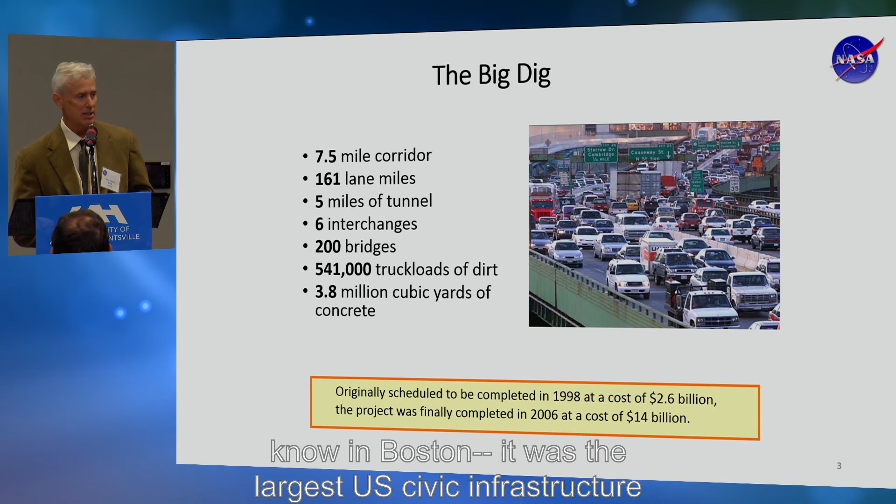The Big Dig, kind of affectionately or not so affectionately known in Boston, was the largest U.S. civic infrastructure project in the history of the United States. And if you look at the metrics there, they're just kind of hard to fathom.

5 miles of tunnels, 200 bridges in a highly densely populated urban area. But the metric I'd like everybody to take particular note of is at the very bottom: in addition to all these amazing things that needed to be done, the project was billions of dollars over cost and years behind schedule. And what you're going to see is that decisions were made that were very mindful of those schedule and cost pressures.

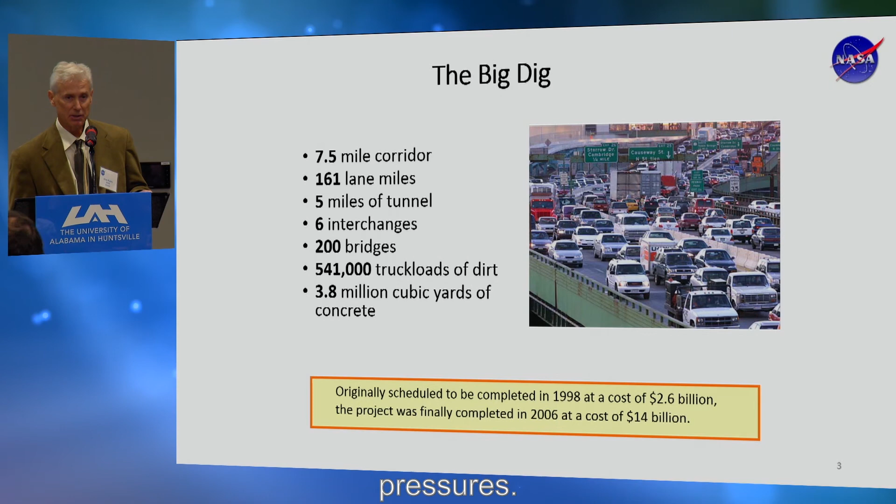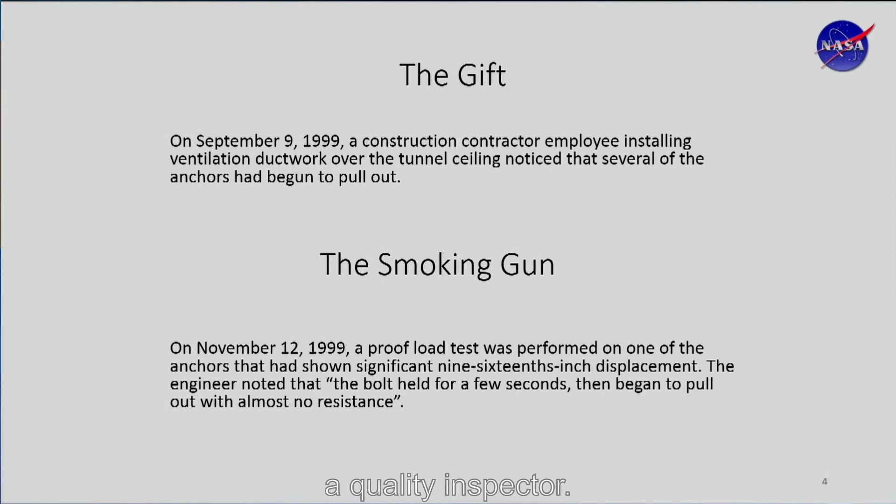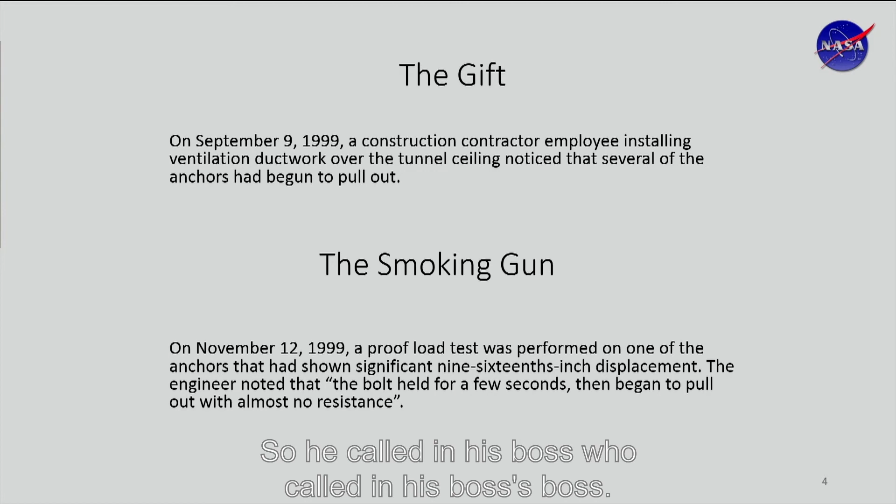So the story begins September 1999. A construction contractor employee, not an engineer, not a quality inspector, noticed that some of the fasteners in the tunnel ceiling had started to pull out. He thought, whoa, this just doesn't look right. So he called in his boss, who called in his boss's boss, and they pulled in the engineers to evaluate what the deal was.

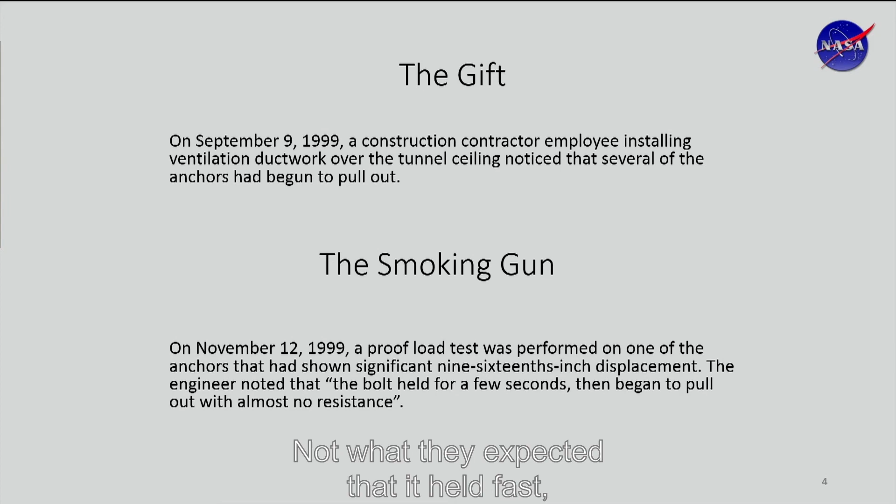They performed proof testing on this particular fastener and a number of others that had also been observed to have pulled out. And the behavior was not what they had ever seen before, not what they expected - it held fast, strong at the proof load pressure, but then it just slipped out very quickly. So that was a pointer to a causal factor that was not understood or seen at the time.

So this is what the contractor employees saw.

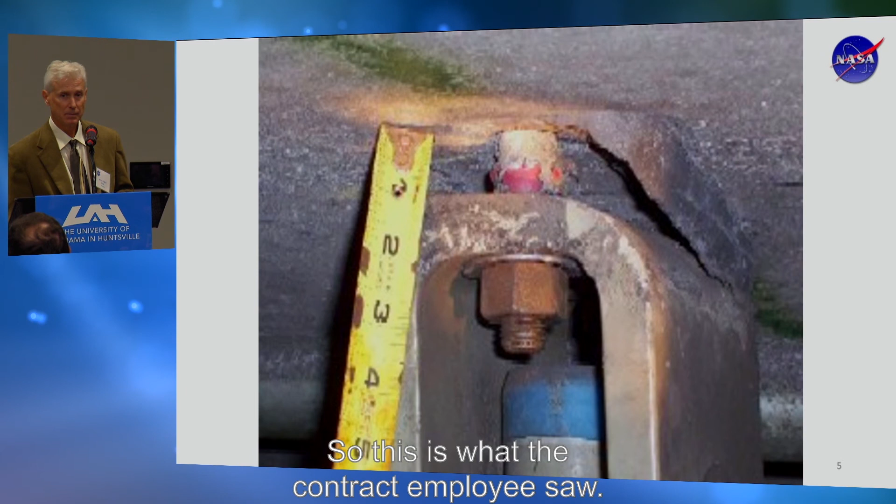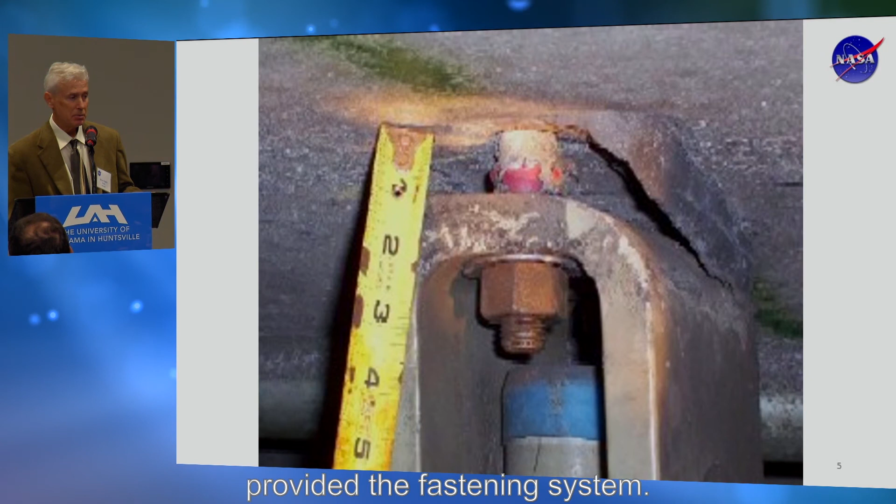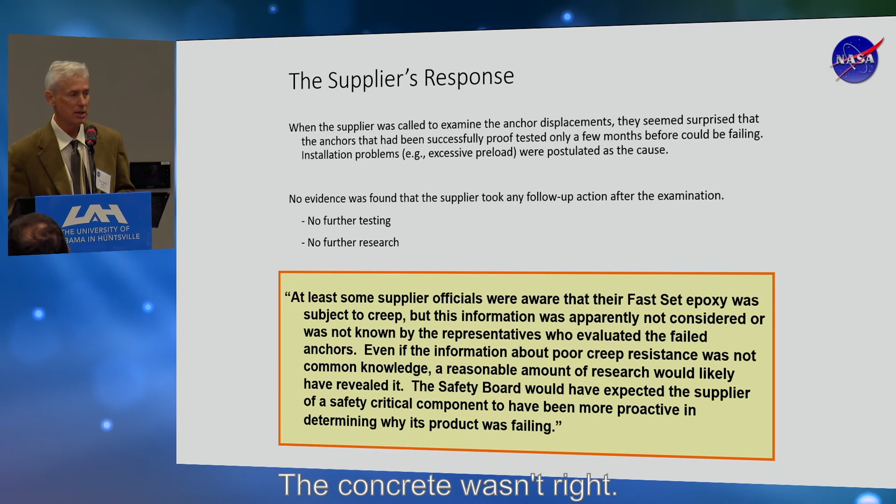So they did what you would expect them to do. The construction company and the engineers called in the experts, the fastener supplier who provided the fastening system. They came in, looked at it, scratched their heads and said, I don't know - this was proof tested, it passed, it had to be you guys. The concrete wasn't right, the cleaning procedures weren't adequate, the preload was excessive - some other reason besides the fastening system being inadequate. They didn't do anything beyond that and then walked away.

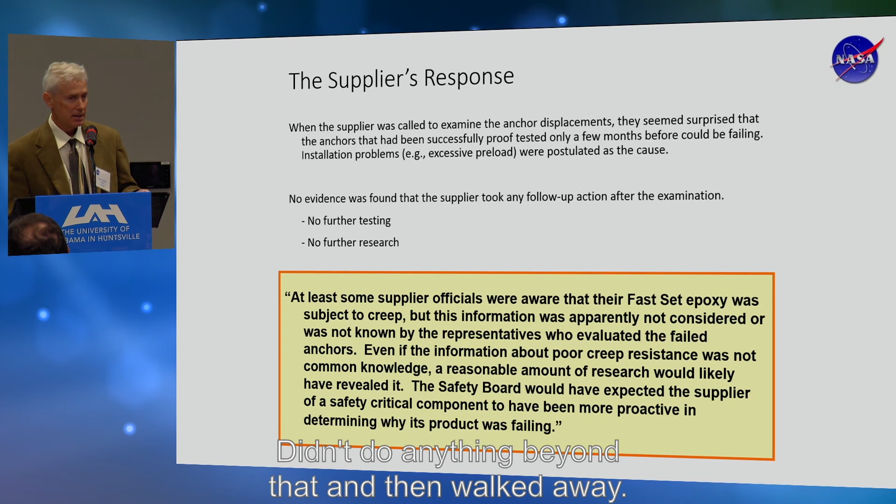So you're left with the builder, design agent, project manager trying to figure out - okay, the experts have spoken - so they fall back to tried and true proof testing. And just to show you the seriousness that they took this for, they went at it with vim and vigor.

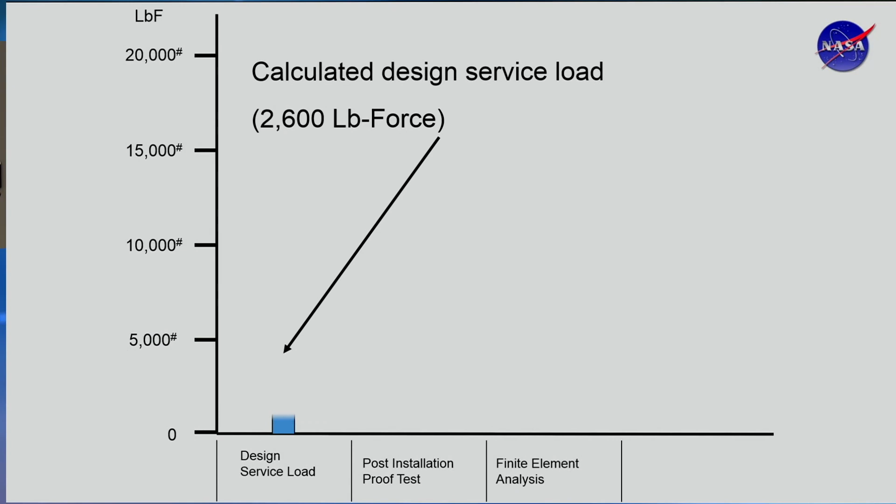The design service load was 2,600 pounds. They had been previously strength tested to 25% over the design load, 3,250 pounds, successfully - all of them.

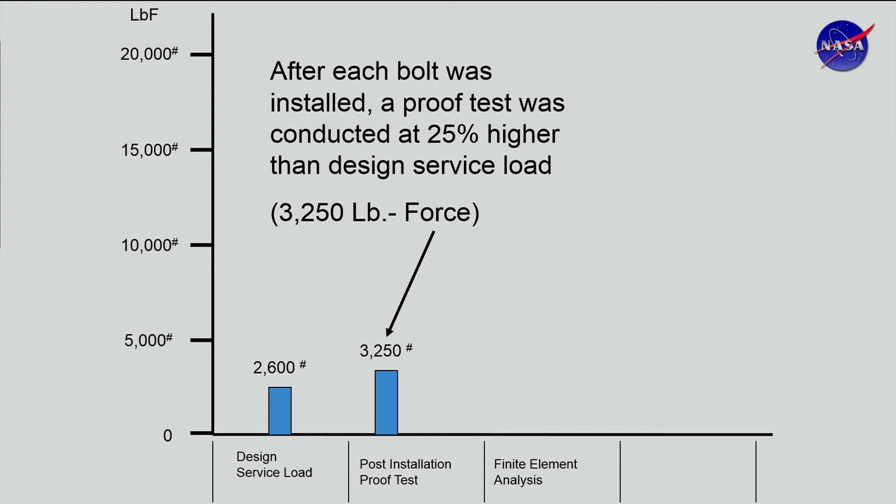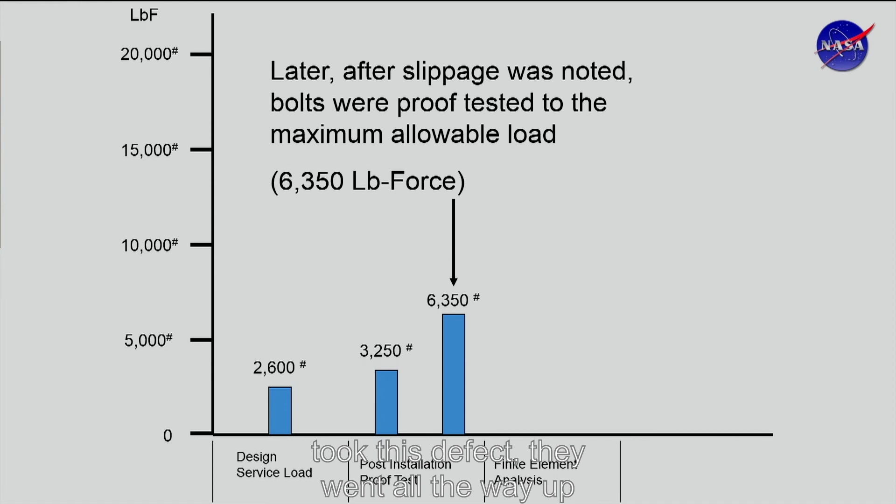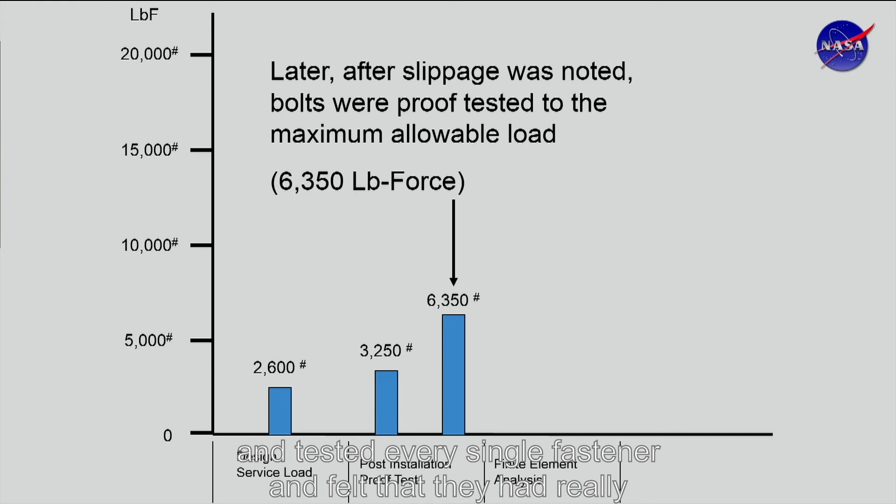And then to show the seriousness with which they took this defect, they went all the way up to failure - pre-failure, maximum allowable load - and tested every single fastener, feeling that they had really done their due diligence. To complement that, they performed finite element analysis just to verify their design assumptions concerning the design loads, and everything checked out.

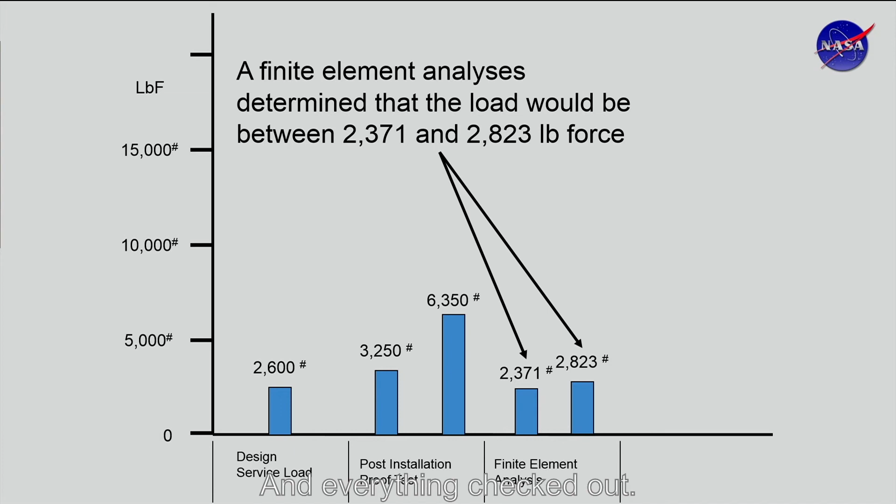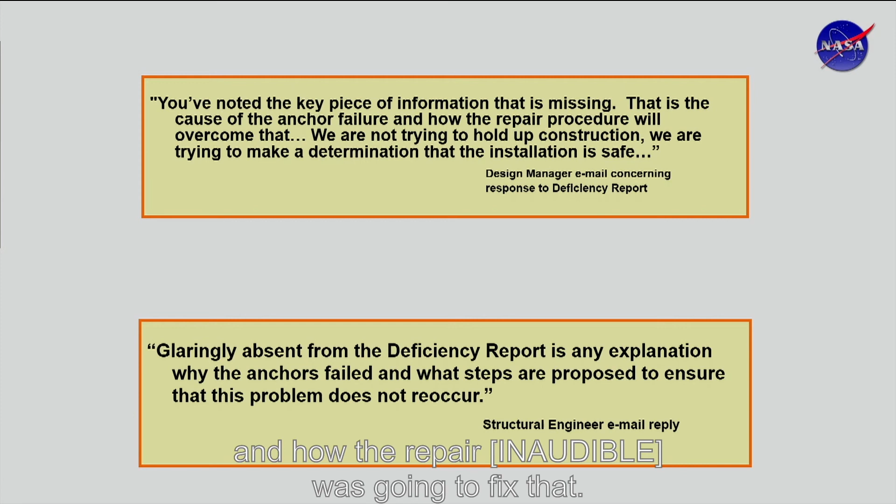But this didn't sit well with a number of engineers. Later on, emails came out - the first from a design manager, and then the reply from a structural engineer. He points out that the key piece of information missing is the cause of the anchor failure and how the repair procedure is going to fix that. The reply from the structural engineers basically agreed with this: glaringly absent is any explanation as to why they failed and steps to show that the problem doesn't reoccur.

And when I provide the same presentation to quality persons, I always ask - where is the voice of quality? Why didn't they throw down that red flag? The causal factor was not identified - you can't, don't pass go till you figure that out.

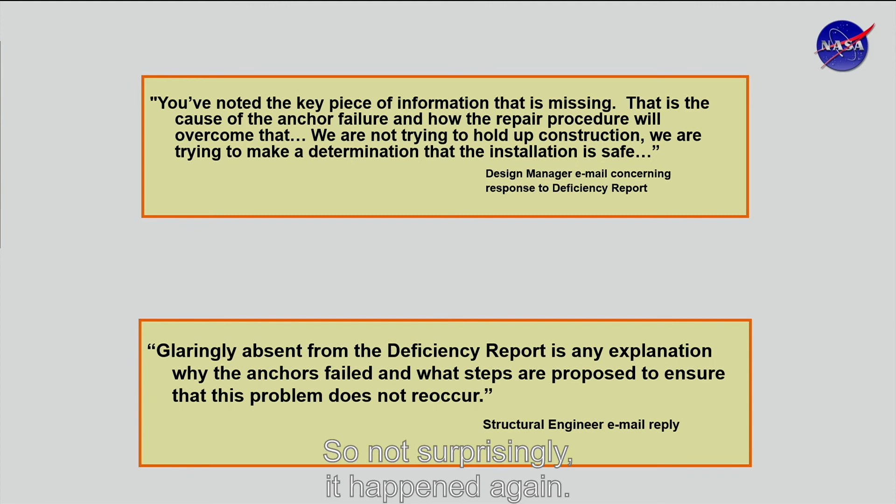So not surprisingly, it happened again. This time it was a quality inspector, and he noticed that fasteners were again slipping out, but these had been tested to 6,350 pounds, the full maximum design load. Reason for failure: unknown. And later on, after the accident, the NTSB came in and said at this point it really should have been obvious that they hadn't identified the cause, hadn't implemented effective remedial measures, yet they kept treating it as isolated instances.

As a long-time quality professional, I can't tell you how many replies - this was early on in my career - came back saying it's an isolated incident. Rarely is it an isolated incident.

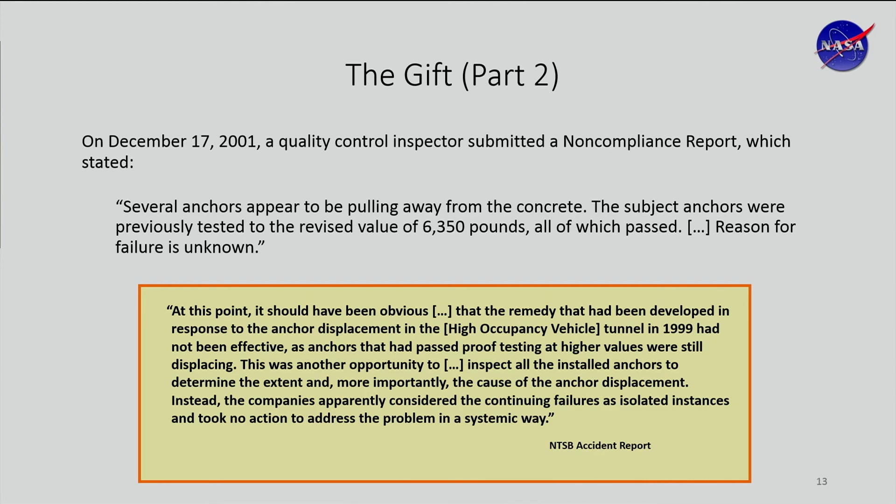And then it happened. They didn't treat it systemically, just a bunch of isolated cases. It's mind-boggling to me that when the inspector noticed some that had slipped out, they didn't do 100% inspection. That would have been quick, easy, cheap to do. So in any event, the accident occurred: 26 tons of concrete detached from the roof, landed on a passenger car, and killed the passenger.

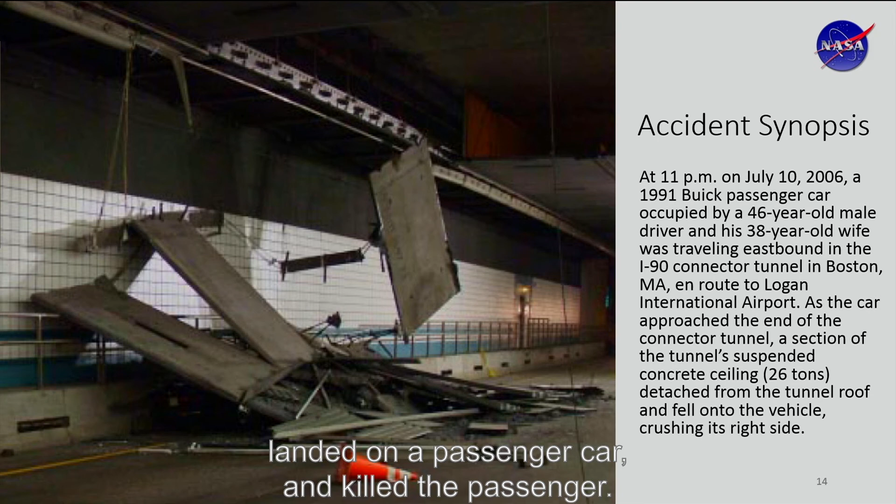So the NTSB came in, did their accident investigation, and the proximate cause was determined to be the use of an epoxy anchor adhesive with poor creep resistance. Say what? For me, I read that and thought, what is creep? Does anybody here know what creep is who didn't learn it by coming to understand this accident? Not me.

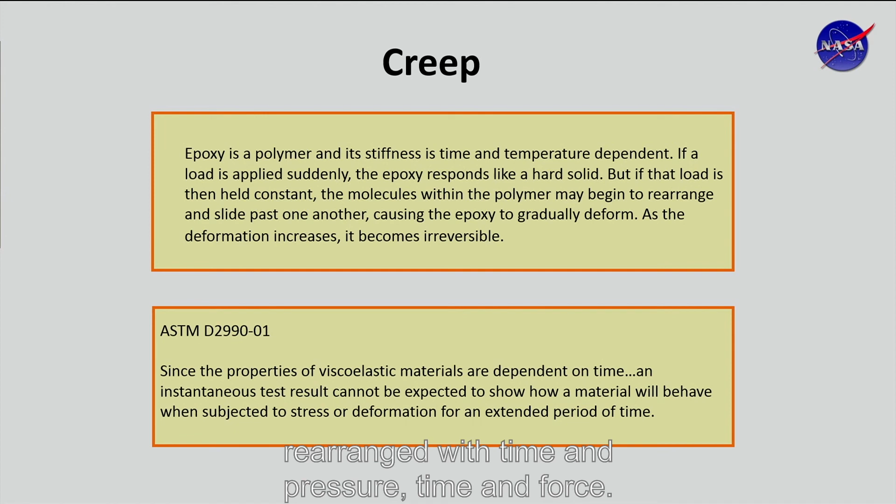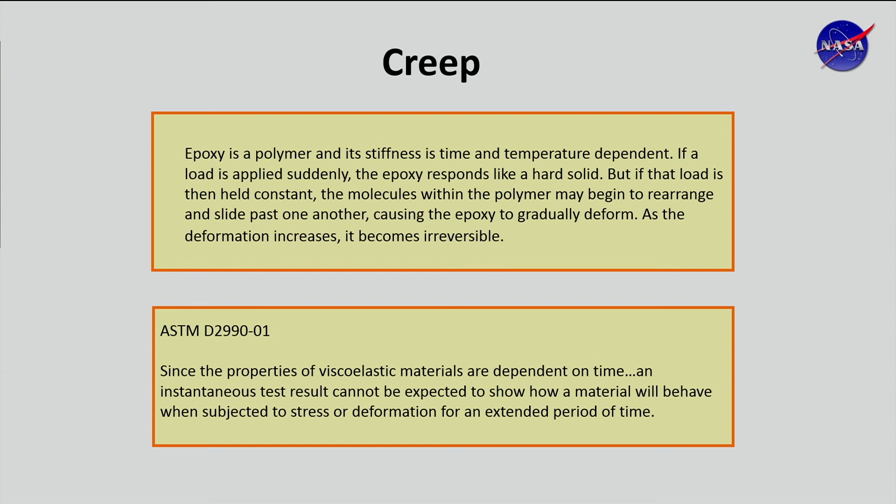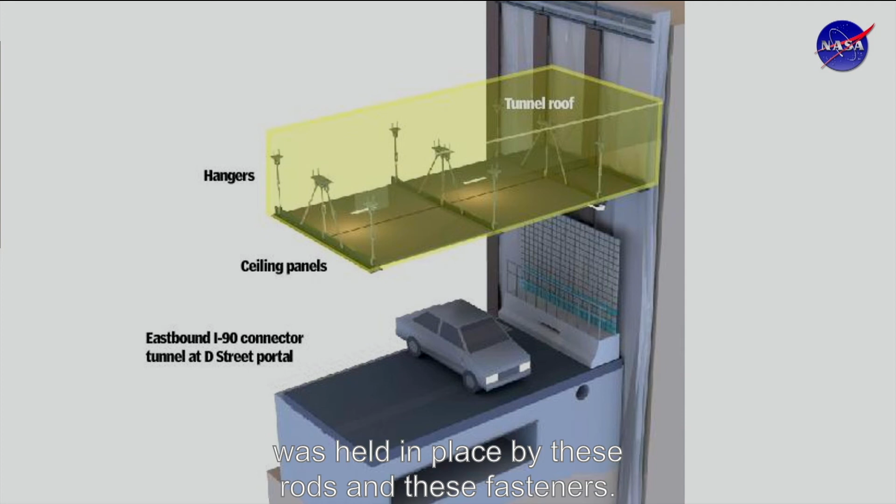Pointed in the wrong direction. So I'm going to go over a few schematics, and each of these identifies what I call a contributing causal factor of a design vulnerability. The first is that the ceiling was held in place by these rods and these fasteners, and it didn't need to be. Most tunnels constructed at that time had continuous ceilings. They didn't need to be suspended ceilings. Much safer design.

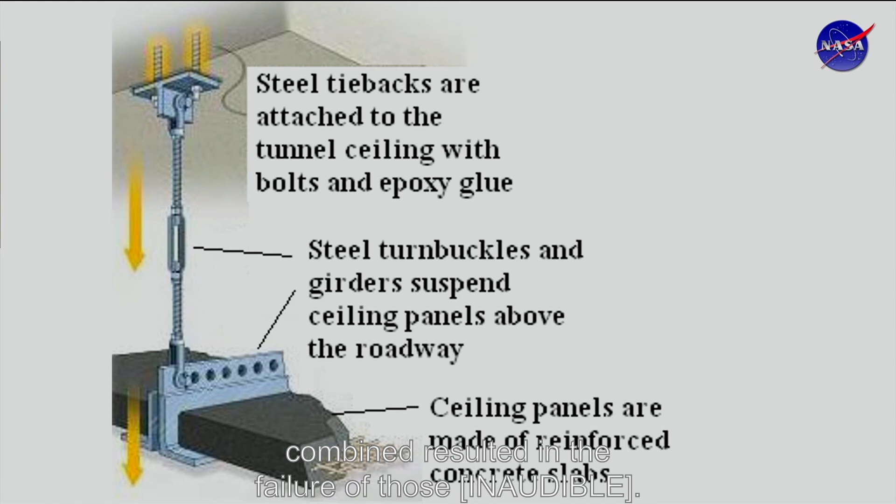Next, ceiling panels made of reinforced concrete slabs. Initially, the ceiling panels were lightweight laminate panels, and then a cost savings engineering change proposal came in that said it would cost a fraction to just make these out of concrete. That was approved. A lot of money was saved. But as we see later on, the force and time factors combined resulted in the failure of the ceilings.

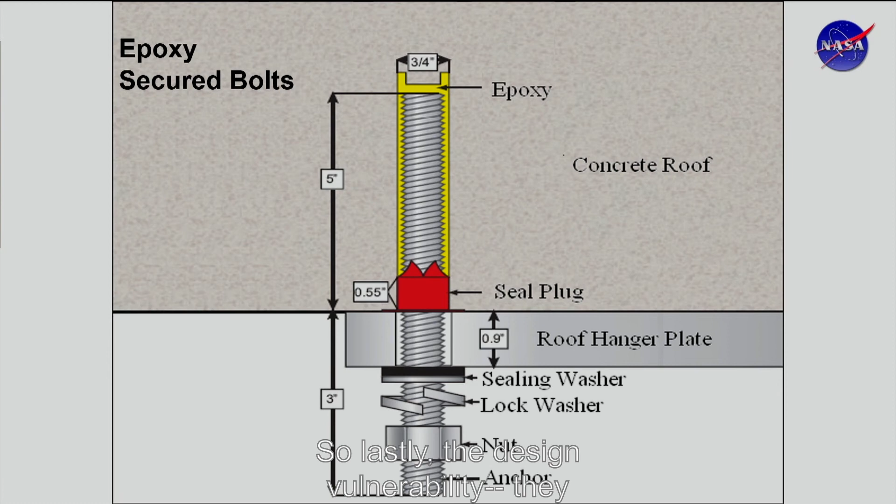So, lastly, the design vulnerability: they used basically glued-in studs. Didn't need to do that. Mechanical fastening systems were recommended by engineers and discounted or discarded in favor of this, which had inherent vulnerabilities. And just a point of note, the epoxy itself, not just the stud, is a safety critical item. Its failure can cause loss of life, and it did. You'd never expect that.

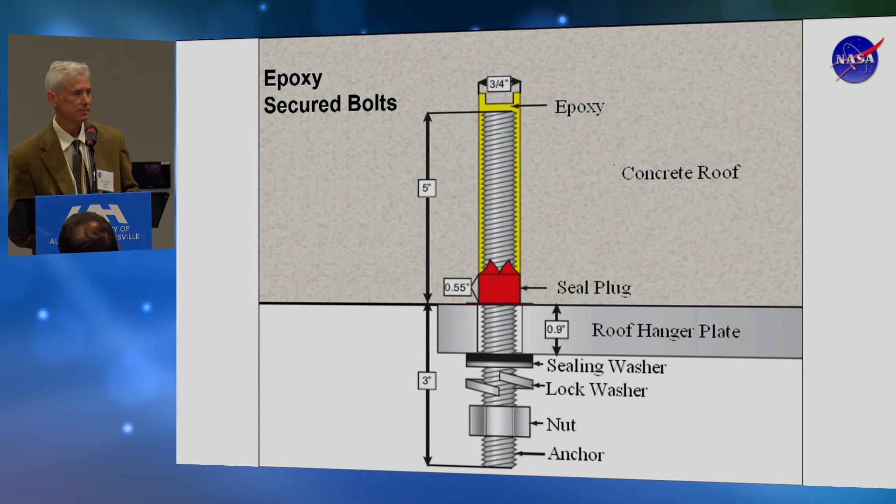So we're going to get into the unknown knowns, and this is so relevant to the discussion we just had. Corporately, the supplier manufacturer knew all about creep. In fact, they had tried unsuccessfully to pass these fasteners for creep, but the individuals called onto the scene to investigate had no knowledge of that. The knowledge had not been captured and transferred to the right people.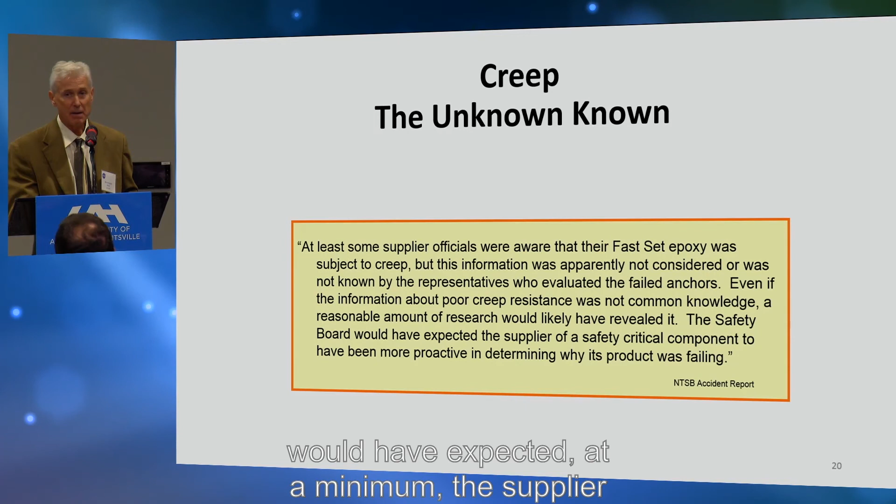As the safety board says, you would have expected, at a minimum, the supplier of a safety critical component to be more proactive in determining why the fastener was failing. And not just the supplier - culpability is spread among multiple organizations here: designers, contractors, managers, overseers. Nobody had any knowledge of this phenomenon, even though it was being used for safety critical purposes. This gets back to one of the initial slides - even after being presented with striking evidence of anchor creep, they didn't recognize the weakness. And no matter what they did, all the best installation practices, all the proof testing in the world, it wouldn't have fixed this problem because it was the wrong solution.

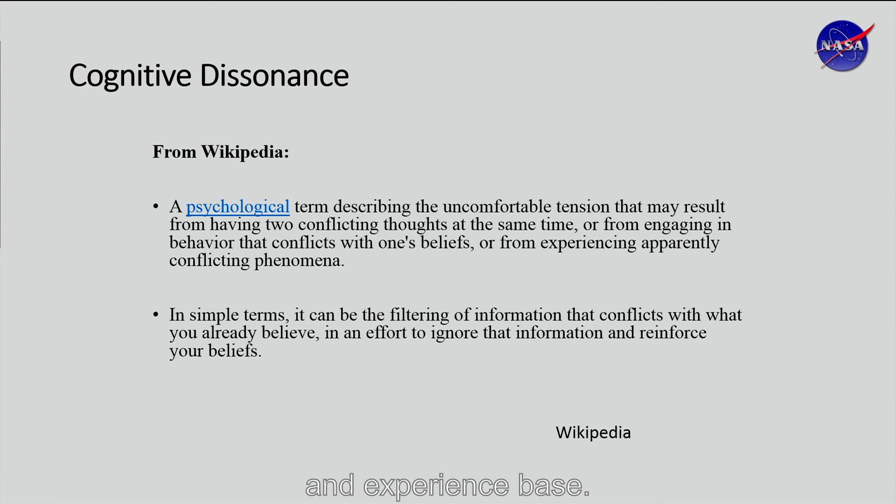So now we get into why. How could they have missed it? There are a couple terms I'm going to throw at you. The first is cognitive dissonance. It's a psychological term - effectively all of us do it. We have our own experience, our own knowledge, and everything we see we filter through our knowledge and experience base. And if you see something that just doesn't align with that, doesn't compute, is beyond your reality, you filter it out and come up with explanations that do fit your knowledge and reality base.

And that's what occurred. It's also referred to, or very similarly, as failure of imagination. This term was used in Apollo 1. It's also been used for other major catastrophes: 9/11, Titanic, Pearl Harbor.

And it's also called the black swan factor. It's when, in hindsight, it's basically 20/20 — in hindsight, it was obvious it was going to happen, it had to happen. You just couldn't see it in the present time.

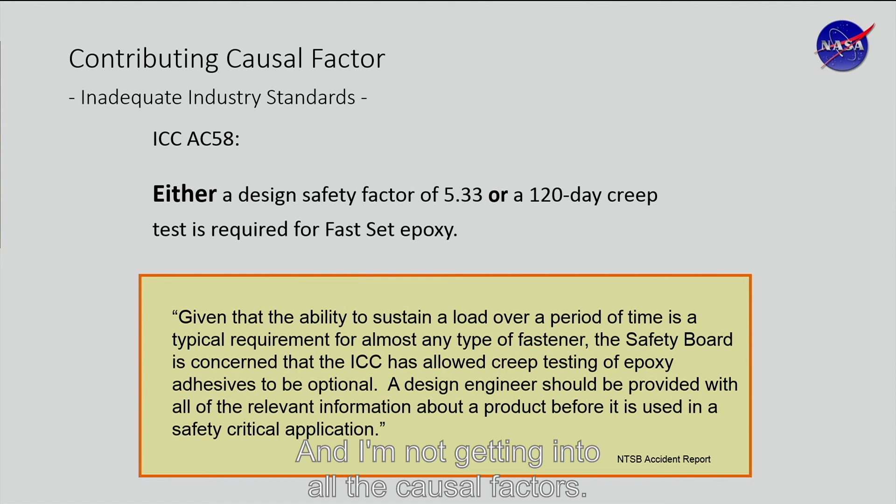So this is a little bit of a footnote, because I don't want it to be missed, and I'm not getting into all the causal factors — there's so many — but this one is particularly relevant to this audience. The question was asked yesterday about the adequacy of technical standards. Well, this is a case where the technical standard fell flat.

It gave an option of either performing a creep test or a design safety factor — effectively a proof test of 5.33 times the safety margin. And the NTSB found fault with that for good reason. As you've just seen, proof testing did not prove the safety when you have epoxies involved.

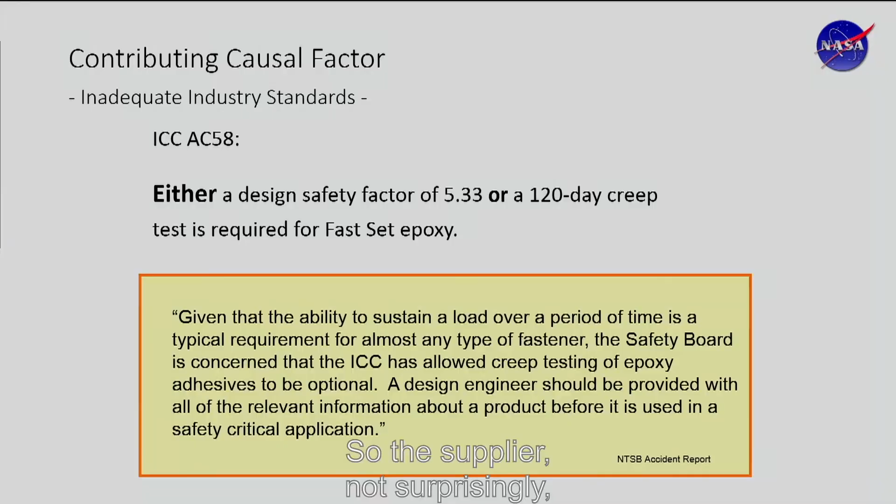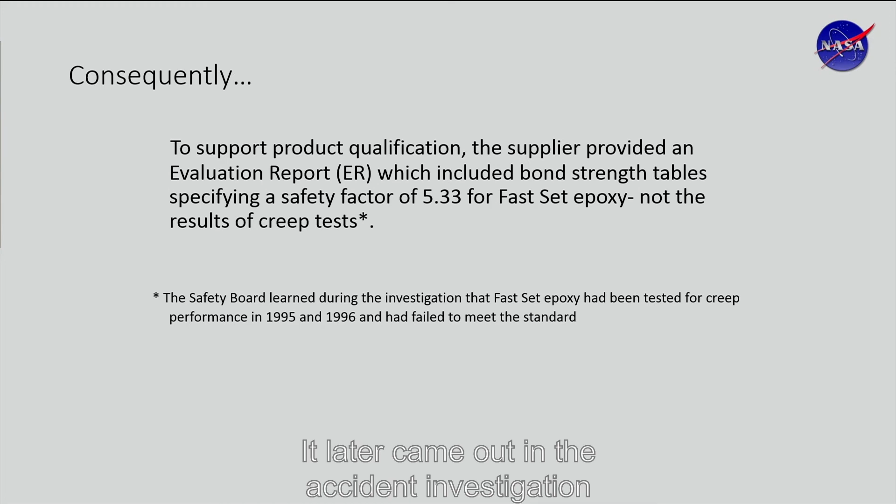So the supplier, not surprisingly, to support product qualification, provided an evaluation report showing they satisfied the safety factor of 5.33. It later came out in the accident investigation that they had tried multiple times for their fast-set epoxy to pass creep testing, and it did not. So here's a case where they provided something they had corporate knowledge was not adequate for that application.

And this is what it looked like after the accident investigation. Anybody — your child, your grandmother, your dog, if it's a smart dog — could have seen that and said this is not right. Yet nothing was done to make sure they had remedied this problem through their proof load testing.

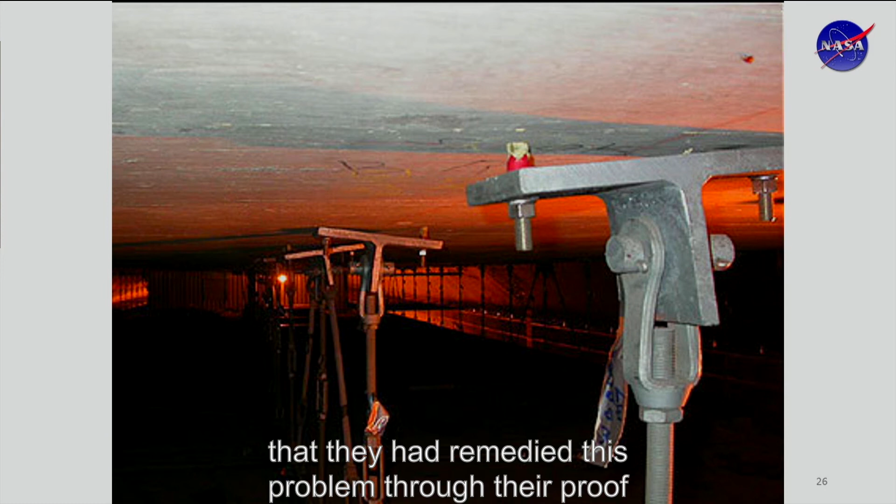And the last slide I have here is just an add-on. I came across this last week and mentioned it yesterday. How relevant is this to NASA? In a very general sense, yeah — lessons learned that have broad application. But even more specifically, how relevant are the behaviors of carbon fiber polymers? Well, they might be extremely relevant, so it's good for us to learn and heed lessons from other arenas.

Destination Disaster is the name of a book written by Paul Eddy, a terrific book that chronicles the events leading to the loss of the McDonnell Douglas DC-10. In March 1974, it left Paris, and at 11,500 feet the rear cargo door blew open, creating an explosive decompression. The plane lost all its control surfaces and crashed in a forest in France, with all persons lost.

Proximate cause was determined to be a faulty latch. Again, it's like one sentence summarizes it — just proximate cause. It's so simple: an epoxy adhesive, a faulty latch — yet there are multiple causal factors all interrelating, but often the proximate event is something very, very simple in its nature.

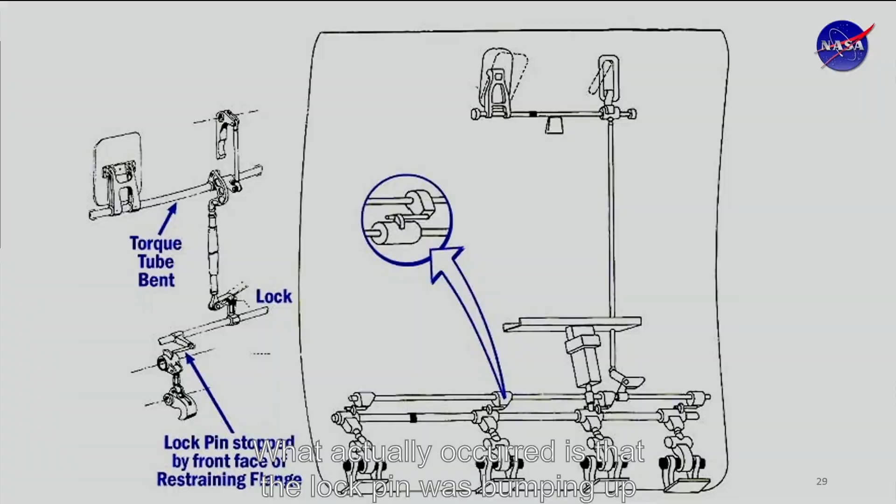What actually occurred is that the lock pin was bumping up against the restraining flange, but if you push down hard enough onto the door latch, you could actually close it, or think you had closed it. Multiple complex linkages — to quote this: a baggage handler of normal strength could push the handle fully down, thinking he had thus secured the closing door, when all he'd done was bend the internal bars and rods out of shape.

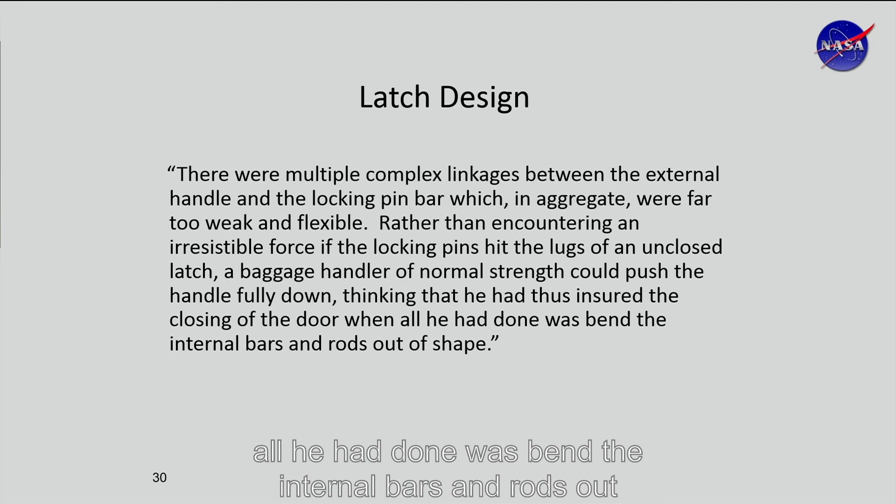So this book again is rich with insights and wonderful quotes. This is his comment upon the integrity, the goodness of the latch design. And this is a great segue, because they had such a poor latch design, the other safety factors became critical. And this is where we get into design vulnerabilities.

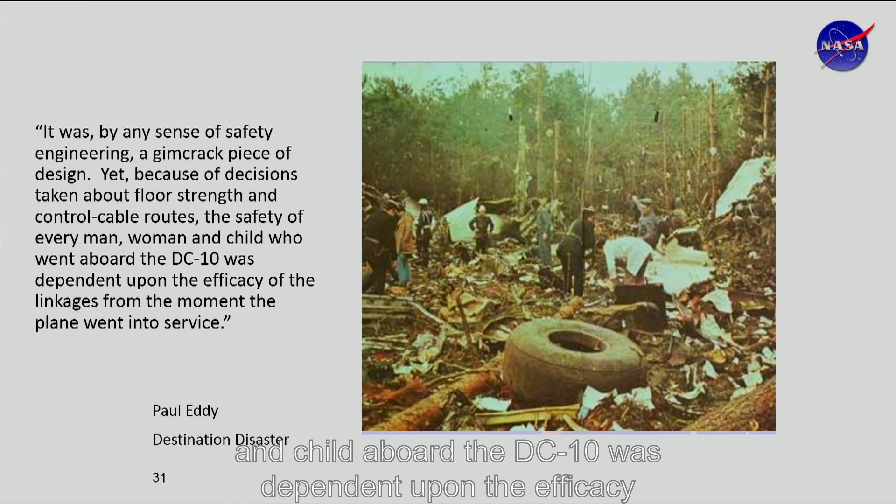He says, because you had a gimcrack — I've never heard that word before, I like that — latch design, safety in every man, woman, and child aboard the DC-10 was dependent upon the efficacy of the linkages from the moment the plane went into service.

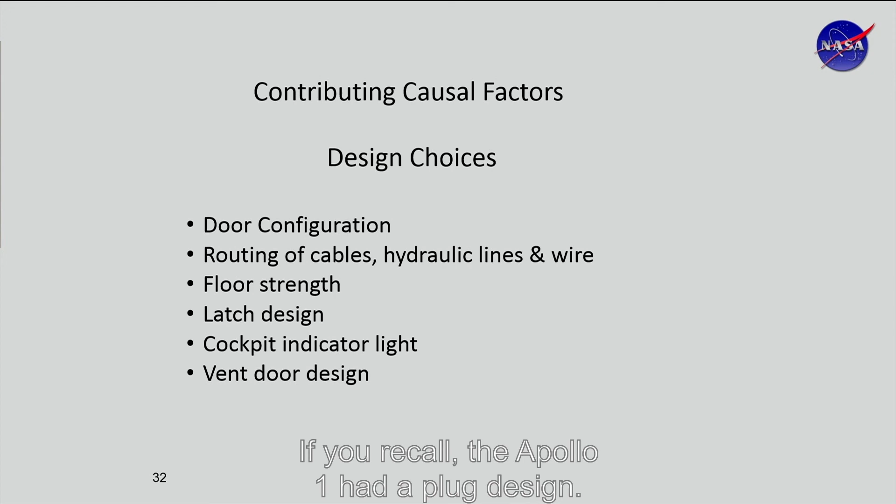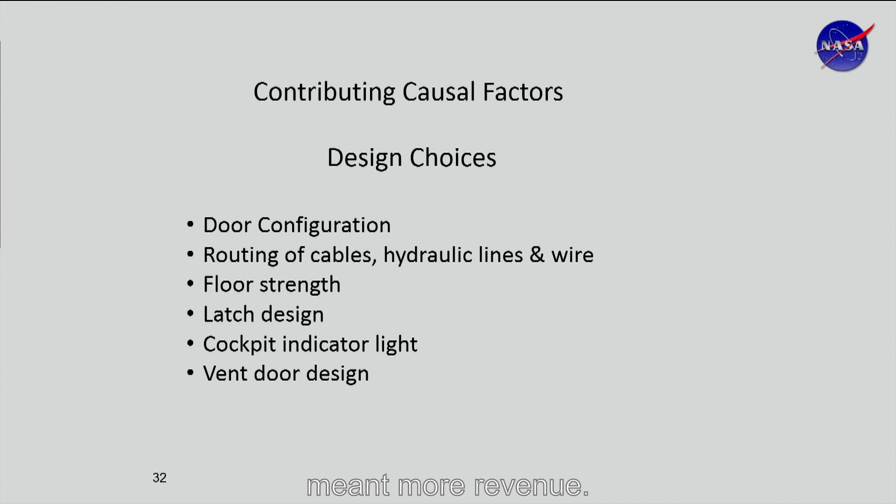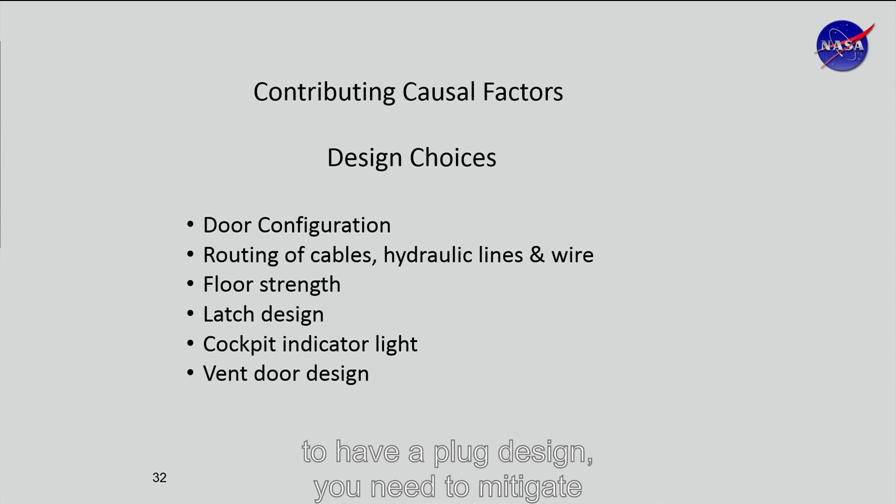So what are the contributing causal factors from a design perspective? The door configuration was an outward opening hatch door. Not a bad design choice. If you recall, Apollo 1 had a plug design, much safer from this perspective, but outward opening doors left more room inside the airplane, which meant more passengers, which meant more revenue. So economically it was a better choice for McDonnell Douglas. Not a bad decision, but when you made that decision, similar to the Apollo 1 decision to have a plug design, you need to mitigate that with appropriate design choices.

Some of the design choices: routing of cables, hydraulic lines, and wire were in the floor, immediately above the cargo compartment. When the explosive decompression occurred, all those were lost. Floor strength, again, a design choice to have a floor that could not withstand an explosive decompression, even though the possibility existed.

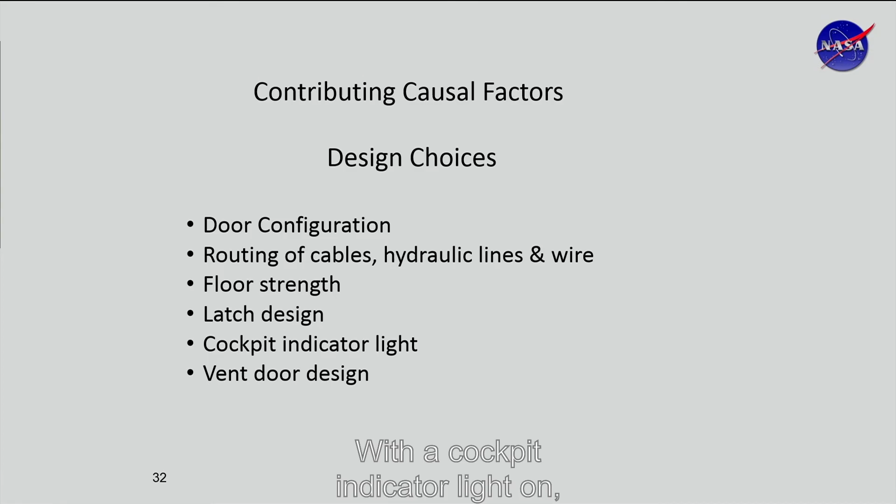We've talked about latch design, cockpit indicator, and vent door design. With the cockpit indicator light on, because the door had not been shut, the pilot would not be permitted to take off. If the vent door was open, then it would be impossible to pressurize the cabin, so the plane could not take off. But both of those were operated from the latch itself. So if the latch is down, if the handle is down, the light went off, the vent door was shut. Bad, lack of safety design principles.

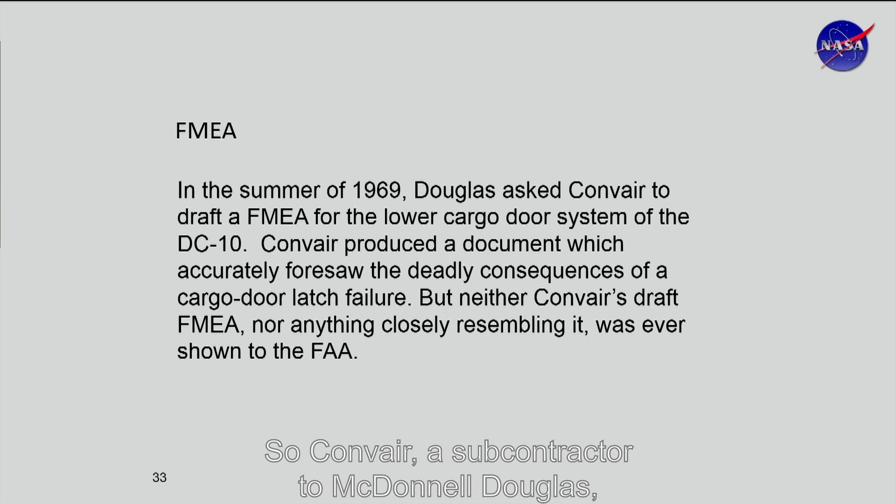And now we're going to get into what you might call unethical behavior. Convair, a subcontractor to McDonnell Douglas, performed an FMEA, and it showed definitively the deadly consequence of a cargo door latch failure, but the FMEA never made it to the FAA. That was a decision made on the part of McDonnell Douglas, the first of many bad decisions.

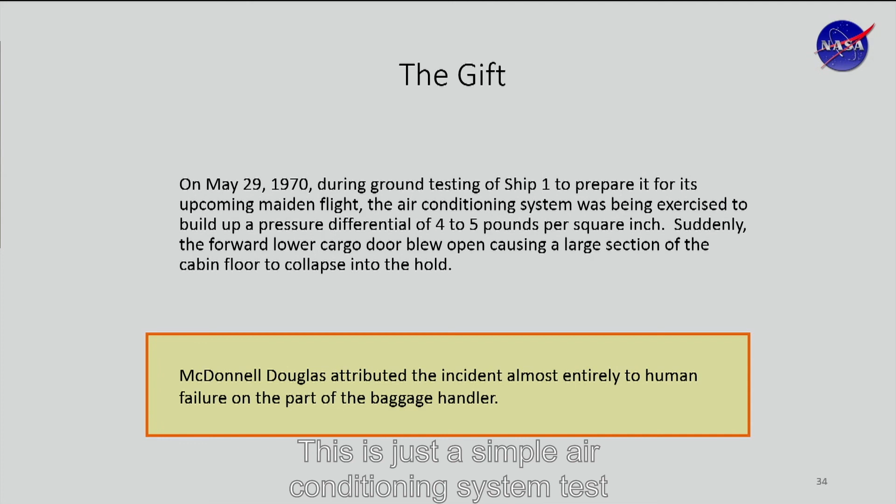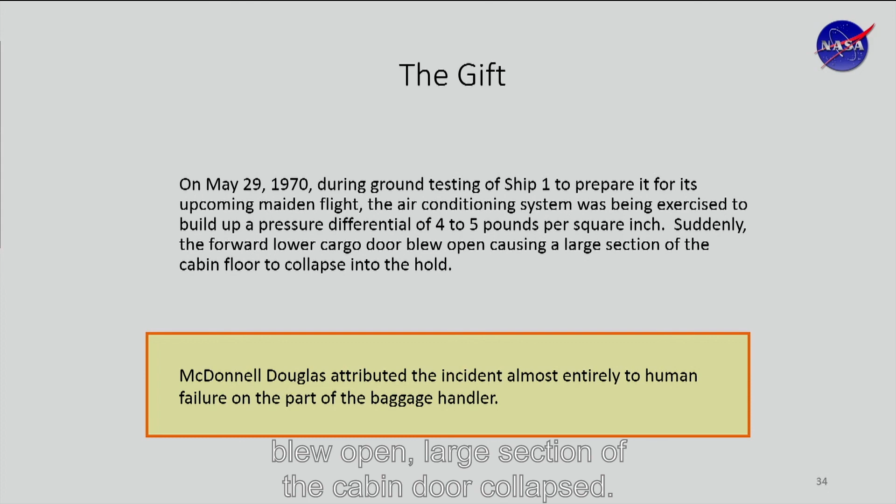So the gift occurred. Here we have no loss of life, no loss of significant property. This was just a simple air conditioning system test that took the compartment to 4 to 5 pounds of pressure, roughly equivalent to being at 11,500 feet. It's amazing how consistent that is. The lower cargo door blew open, and a large section of the cabin floor collapsed. So not only did the door blow open, but the floor collapsed with all the control surfaces. And McDonnell Douglas attributed the incident almost entirely to human failure.

So, how convenient, how expedient. They didn't really need to pursue it any further. Somebody just screwed up.

This didn't sit well, again similar to the last example, with an engineer at Convair. He wrote a memorandum, which is actually used in engineering ethics courses, called the Applegate Memorandum. Based on the latch design and what happened with the air conditioning decompression incident we just talked about, he said it seems inevitable that in the 20 years ahead of us the DC-10 cargo doors will come open and cargo compartments will experience decompression, and he would expect this to usually result in loss of the airplane. And he was exactly right.

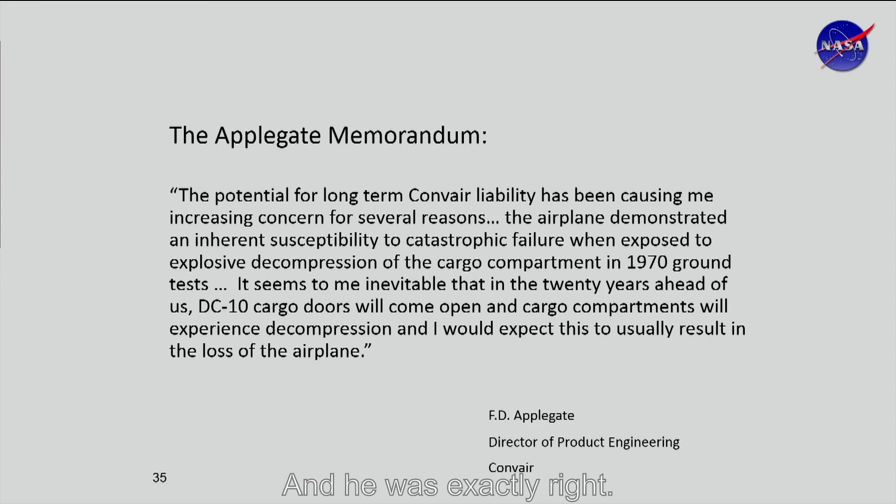As proof of that, we'll call this another gift. This actually occurred in flight. An American Airlines flight left Detroit and got to almost the same altitude. As a quality engineer, I'm kind of impressed with the variation management, the process controls. They had a very tight bell curve. These failed at exactly the same place. Of course, the bell curve was yards to the right of where it needed to be, but it was tight. They always failed at the same time.

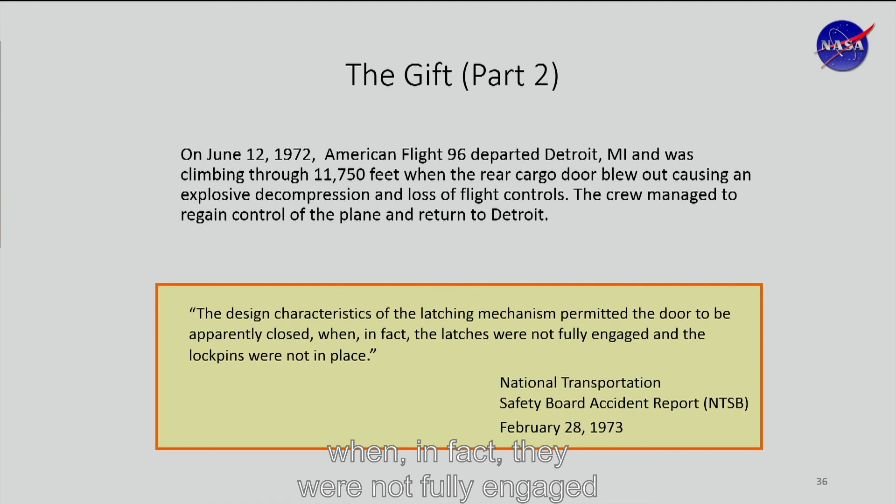But the crew, with heroic effort, managed to get the plane back to Detroit. The NTSB came in, as they had to, and hit the nail right on the head: design characteristics of the latch mechanisms permitted the door to appear closed when, in fact, it was not fully engaged and the lock pins were not in place. The truth was out. McDonnell Douglas couldn't say otherwise.

From this, it really gets almost into the realm of disbelief. The NTSB provided a report with recommendations to the FAA, and the FAA proceeded to write an airworthiness directive. They had it almost ready to go when the president of McDonnell Douglas called the FAA administrator and persuaded him that he really didn't need to write an airworthiness directive, which would effectively ground the DC-10 fleet, making it against the law to fly until all remedial measures had been put in place. So the FAA administrator capitulated and agreed to other measures. Whoops.

So these are the measures in the NTSB report that were agreed to by McDonnell Douglas: install a peephole with a decal showing what it's supposed to look like when the locking pin is securely in place, and install a support plate to hold up the torque tube just inside the handle.

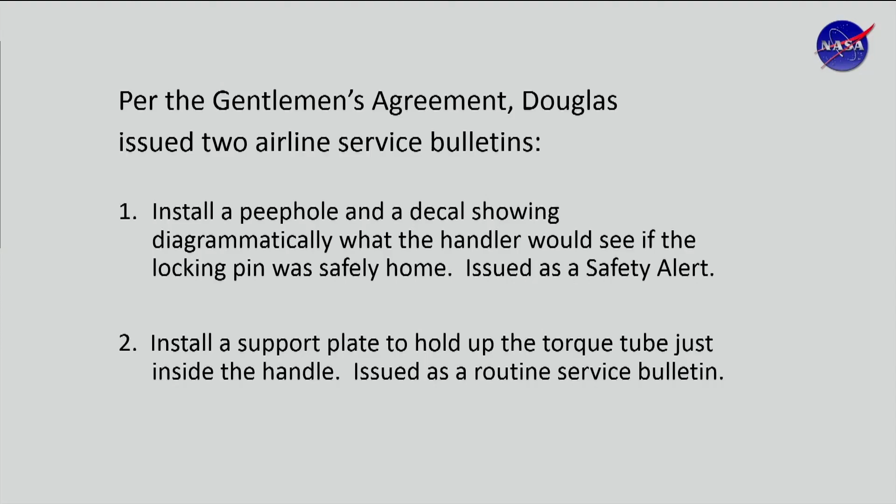They verified with certainty that the plates had been installed, but the three men were brought forward, examined under oath, and none of them could recall ever having worked on that door. To make matters almost comical, one of them was an electrical inspector who would never have been inspecting a mechanical component like that. But Douglas didn't back off.

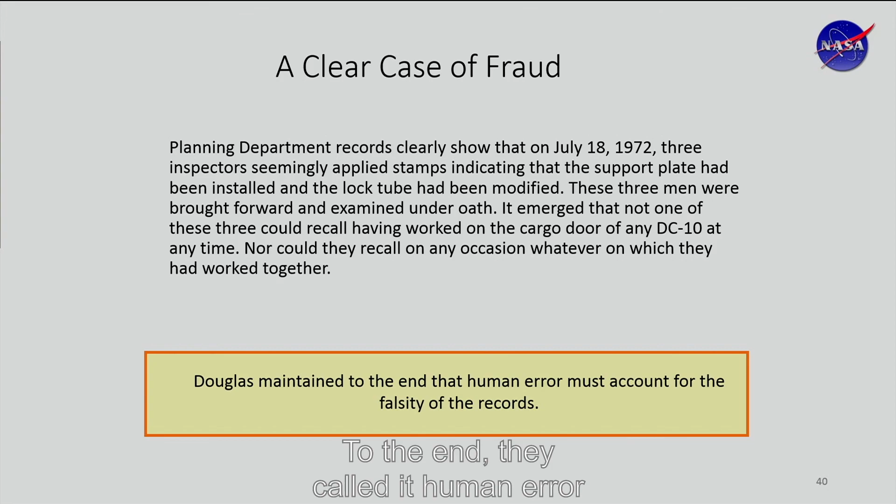To the end, they called it human error and the falsity of the records. And that company, as you know, is no longer in existence.

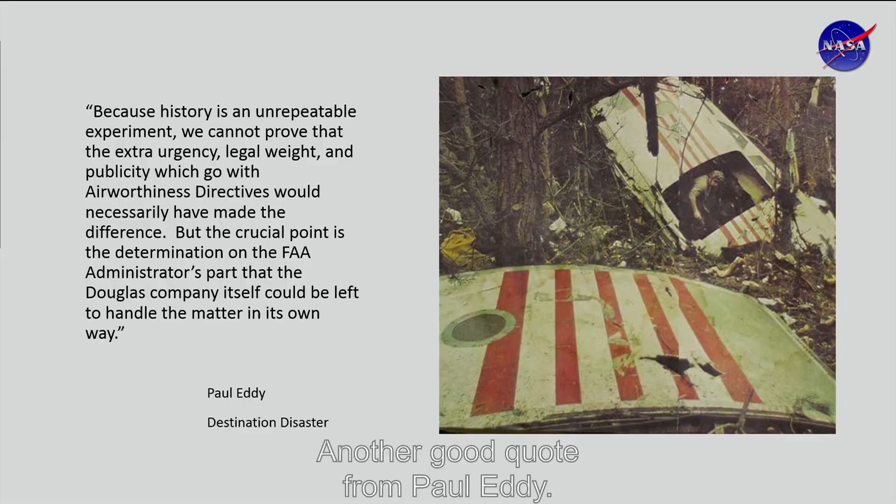So I can tell a story, a little bit of a story. I reported to Newport News Shipbuilding 35 years ago, young, impressionable, eager quality engineer, and they said here's your cubicle, here are a couple of things we want you to read, then come talk to us tomorrow.

One of those things was the congressional proceedings for the loss of the USS Thresher. I dutifully read through that, and I was just so astounded—I had never known anything like that could exist. A series of events, each of which individually seemed unlikely, but the compounding of them, their overlapping at a point in time, created the loss.

It seems remarkably unlikely, remarkably unfair. I later learned, after studying other disasters, that it's really not so uncommon. For most mishaps involving highly complex systems interrelating with each other, there are multiple causal factors that have to all align.

I'm not going to talk about Apollo 1 since it was covered yesterday, and most of you know the details. The only thing I'll point out is both the Thresher and Apollo 1 were brand new platforms, first in their class, with brand new stuff.

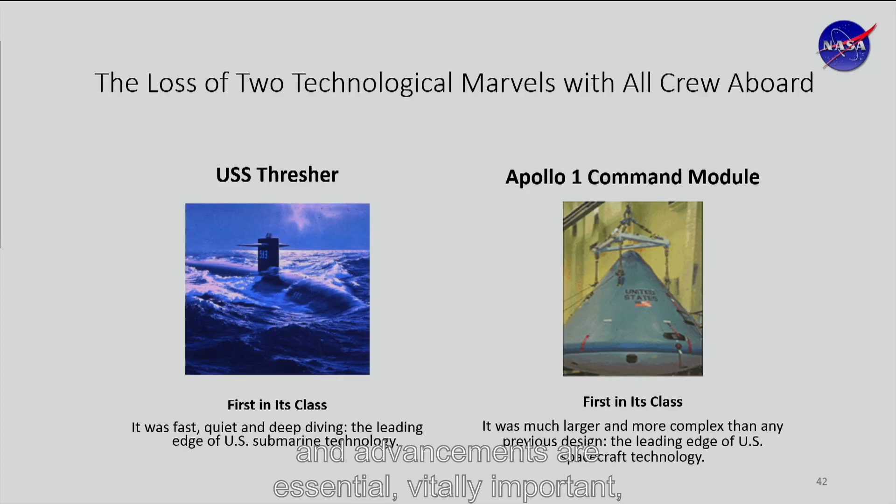Obviously technical innovations and advancements are essential, vitally important, good things, but they come with risk. When something is new, your safety senses ought to be tingling—it's unproven, and it's impossible to prove something that's new. You can do as many analyses and engineering studies as you want, but empirical evidence and demonstrated reliability—there's no substitute for that. Both of these were first in their class, leading edge of technology at the time.

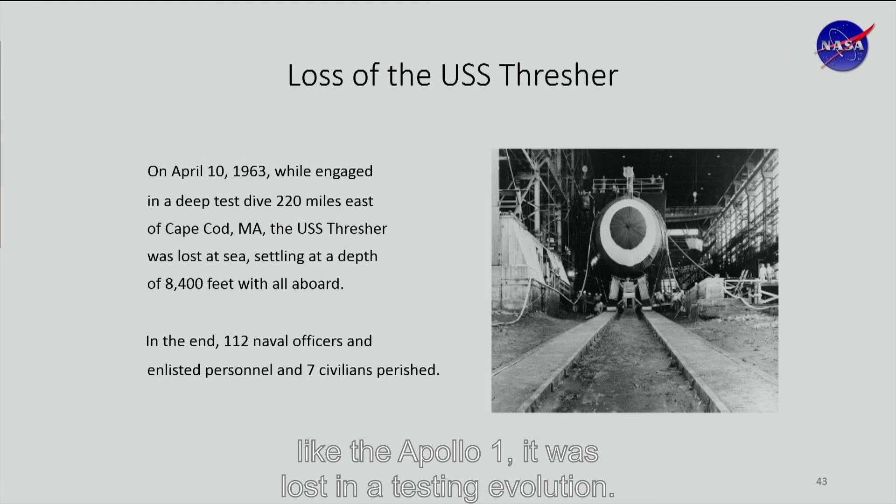Loss of the Thresher, like Apollo 1, it was lost in a testing evolution. All men aboard perished. So here's what happened with the Thresher.

Somebody got up in the morning, had their coffee, went to work, and did a bad job, a sloppy job brazing up a pipe joint. And it was the wrong pipe joint, because this one was exposed to full submergence pressure. When a submarine is hundreds of feet deep, the seawater systems internal to the submarine are exposed to tremendous pressure. So the first point here is that it should never have been a brazed joint to begin with.

Welding joints were known to be stronger and more reliable, yet this was a very bad design decision. So this guy, whoever, probably a guy at the time, performed a bad joint, and it failed. Seawater sprayed from the joint onto a control panel, and that control panel shorted out, causing the reactor on the Thresher to scram.

And submarines, it's not like the movies where they blow and the submarine bobs to the surface. Submarines operate under essentially neutral buoyancy, and they drive up and down by propulsion power. So they had no propulsion power, so they had to blow the ballast tanks.

And when they did that, turns out that the very well-known physical principle at the time, expanding gases cool, basically decrease in temperature. I can't remember the name of it, it's Joule something principle or something like that. It's what makes your air conditioner and your refrigerator work.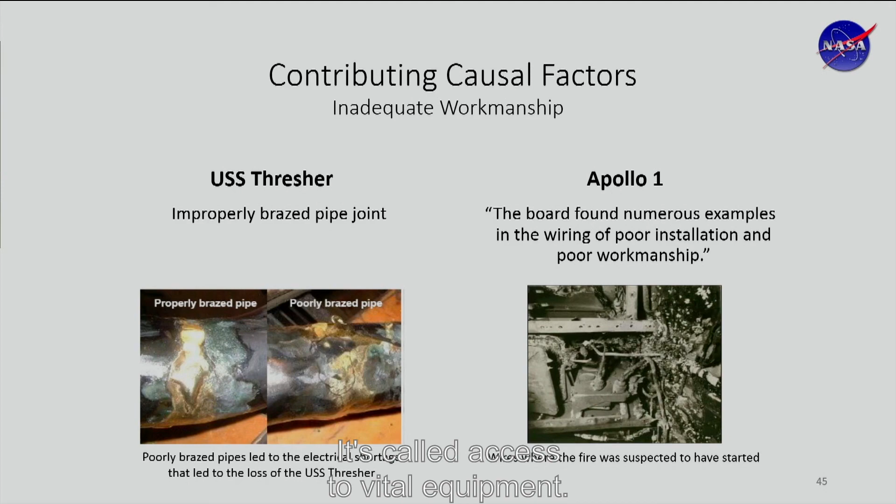It's called access to vital equipment. The seawater valves, you need to get to them very quickly when you have an incident like that and shut them, so seawater is not continuing to get into the submarine. And apparently that did not occur on the Thresher.

So the story just goes from kind of sad to sadder.

It's hard to believe for NDE professionals that UT could ever have been a new technology, but it was a new technology in the early 60s, and they were using it on the Thresher. And what they found is that a surprisingly large percentage of brazed joints didn't have sufficient bond.

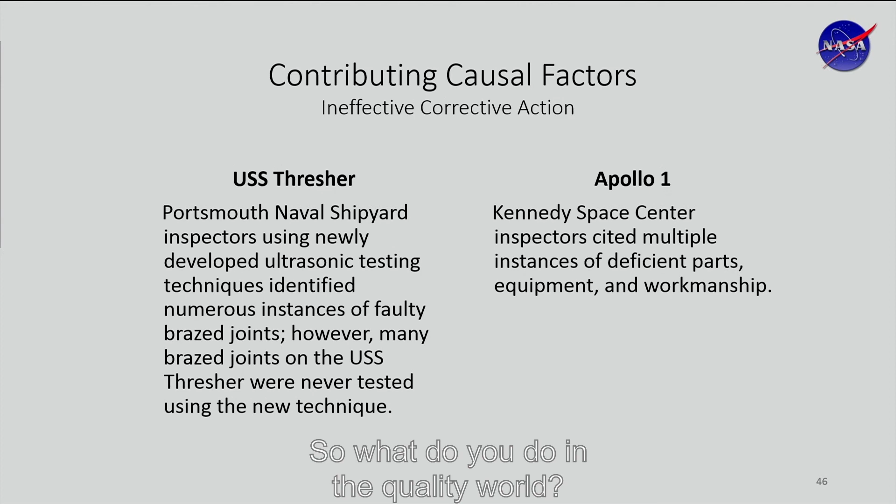So what do you do in the quality world? You develop a sampling plan. First of all, safety critical should not even have been a sampling plan—it should have been 100% inspection, but they didn't do that. So they inspected it, and if you do sample it, the acceptable reject rate should be zero, meaning if you find something, you stop and inspect 100%.

And they found a lot of rejects. It means they didn't stop and inspect 100%. So basically, the quality community fell flat in this case.

I think I've talked about all this. So you have quality shortcomings, manufacturing shortcomings, design shortcomings that all came together at the same time.

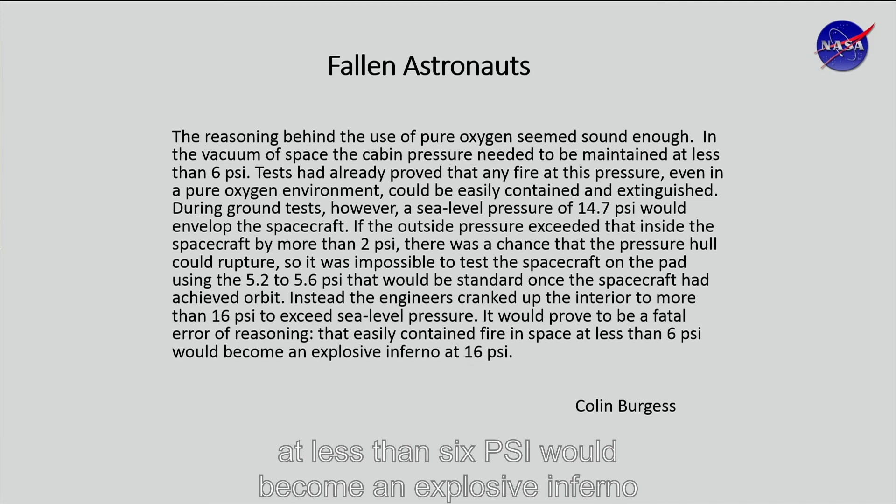I'm sure you've all seen this before. I do want to back up—if you've never read this from Fallen Astronauts, it's pretty moving, frankly. It says, reasoning behind the use of pure oxygen seems sound enough. If you go to the last sentence, it proved to be a fatal error of reasoning that easily contained fire in space at less than 6 psi would become an explosive inferno. At 16 psi, it's a failure of imagination—they didn't even imagine this particular scenario.

Okay, I'm going to jump into a couple things very briefly. Fraud. This would not have been on my matrix of common threads if I had done this five years ago. Fraud is a very real and present danger. NASA has lost tremendous assets, others within the Missile Defense Agency, and I'll get to it, even our Russian colleagues. So we need to be mindful of that. We need to use different tools from our toolbox to combat it.

So about a year ago, an advisory was written that said that Sapa Profiles, and I'd never even heard of Sapa before—they happen to be the largest producer of aluminum extrusions in the world—may have altered mechanical property test results performed on aluminum extrusions. When you see 'may', take your pencil and cross that out; it means an attorney got their hold of it and provided their input. In fact, the company itself confessed very quickly that yeah, this had occurred.

So why the big deal? Well, these aluminum extrusions were used on the frangible joint hardware for the OCO and Glory satellites. And one of the primary causal factors for the loss of those two satellites was the aluminum extrusions with inadequate mechanical properties. So, way big deal.

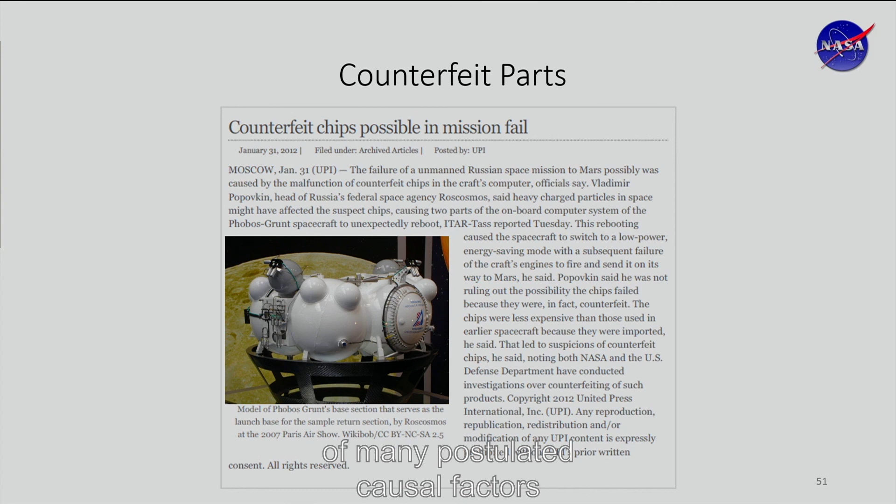Counterfeit parts. A lot of times people think it's somebody else's problem, but it's not. NASA has procured numerous counterfeit parts, our prime contractors dozens more. And the Russians - the most plausible causal factor among many postulated for the loss of the Phobos-Grunt probe, a highly visible, highly costly probe meant to go to the moon of Mars and collect samples, was that they bought their electronic parts from foreign sources because they were a whole lot cheaper. The warning bells should go off like crazy if NASA did something like that.

Whoops. Okay, let's try again.

So those are not isolated cases. The drumbeat just goes on over history - it's always been an issue, percolating along in the background, not really getting our attention. Ten years ago, an M&M Metals Honeywell inspector looked at a bunch of test reports and noticed something funny - the mechanical properties listed for various heats were exactly the same to the third decimal point. It didn't smell right. So he contacted others, and it turned out there had been gross fraud, falsification of records.

Western Titanium, roughly five years ago, had basically been slicing billets - they didn't cold work, roll, forge, or heat treat the billet into final aerospace grade metal. They just sliced it, and it looked, smelled, and felt like finished aerospace grade material, but it wasn't. NASA bought tremendous quantities, as did DoD. One interesting thing that came out with Western Titanium was that another metal with the same economic incentive was steel - Lockheed Martin found the same exact case with A&P alloys.

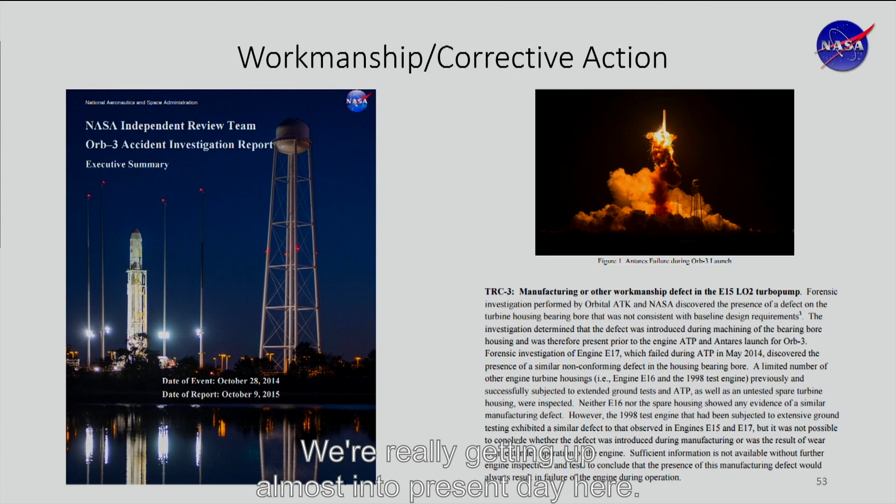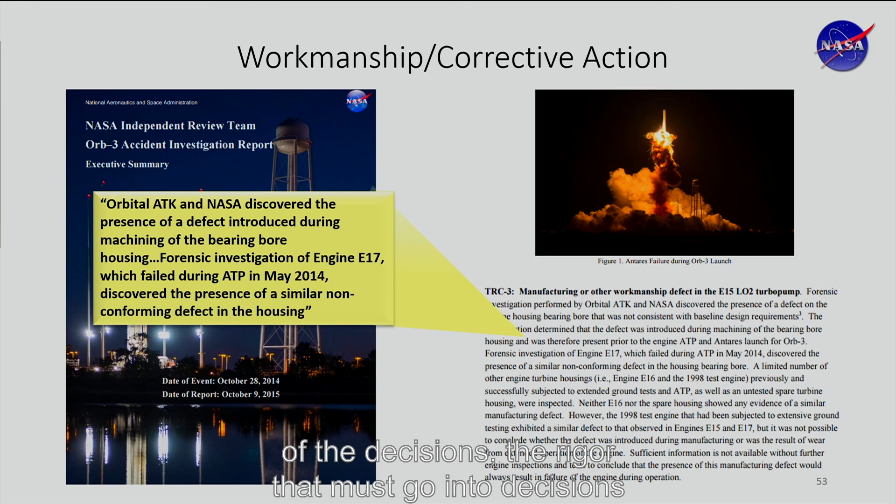Just a couple last slides - this one's different from the others, more recent, getting almost up to present day. This is a case where a machining error had been observed in a previous acceptance test, and it was known and accepted as a risk. The point here isn't to second guess the decision made, but to point out the gravity, the importance of the decisions, and the rigor that must go into decisions when you're accepting risk.

Whoops, gosh, I keep doing that. Okay, proceeding further into modern day - just last year, the rod end of the strut had mechanical properties five times less than called out on the design specifications. That single item caused loss of the launch platform.

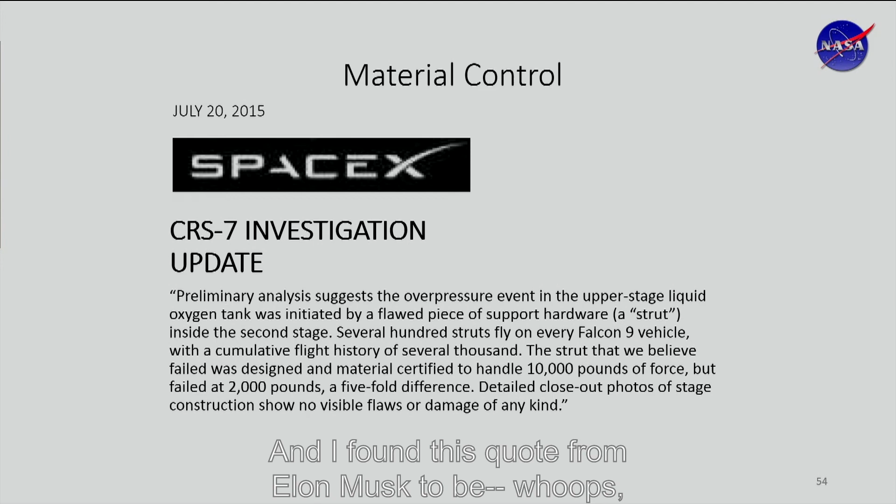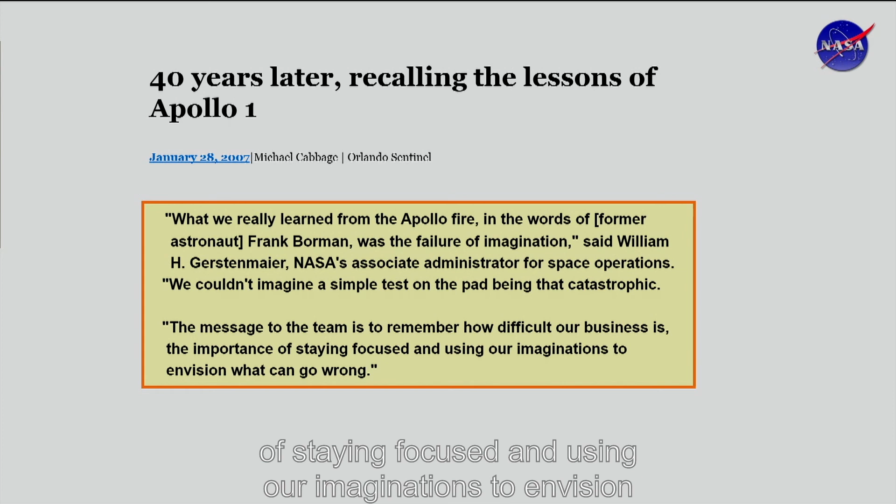I found this quote from Elon Musk to be refreshingly open and honest - he blamed overconfidence, saying when you've only ever seen success, you don't fear failure quite as much. That brought me back to a presentation the chief engineer at ATK gave several years earlier at a quality leadership forum, describing characteristics of high-performing organizations. One of them was a preoccupation with the prospect of failure. That triggered a memory of a quote from our own Gerst: what we really learned from the Apollo fire was a failure of imagination. And the message to our team, my concluding message, is to remember how difficult our business is, and the importance of staying focused and using our imaginations to envision what can go wrong.

That's all I had. Thanks.